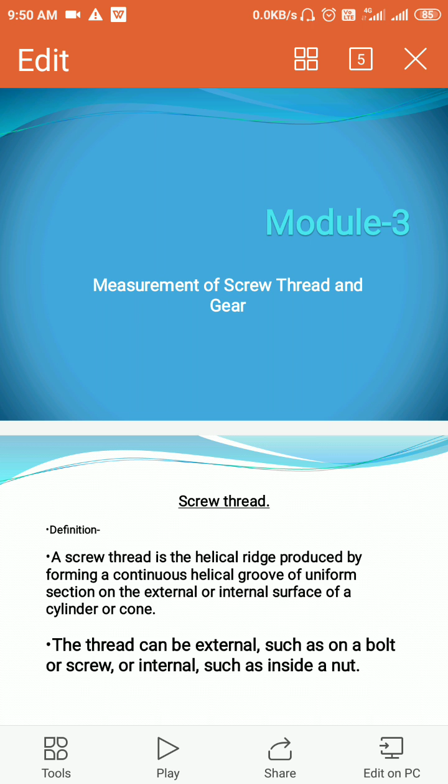This is the new module: measurement of screw thread and gears. Till now we have completed module number 1, module number 2, and module number 4. This module consists of two chapters: measurement of screw thread and measurement of gear. In the first three modules we have completely covered the whole syllabus. In this module I will be covering only one chapter, measurement of screw thread. Then we will go for module number 5.

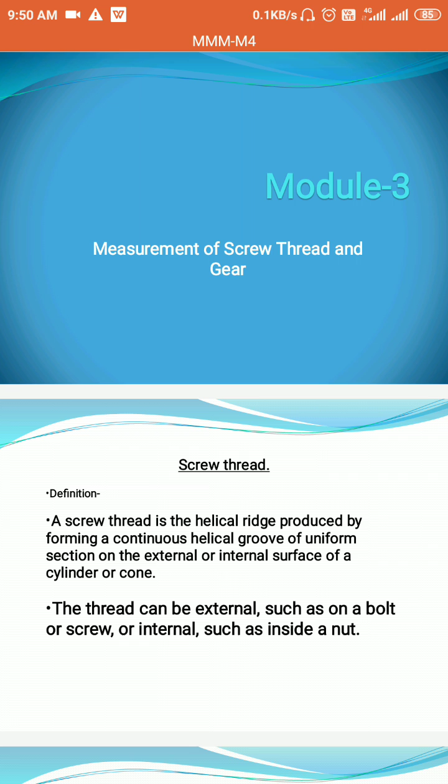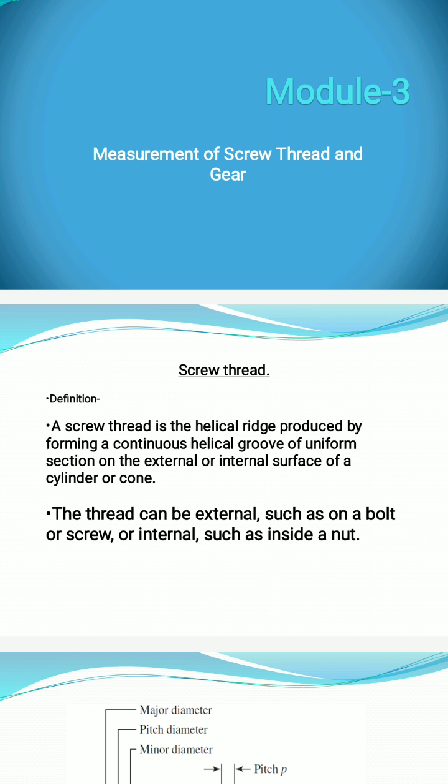So we all know what a screw thread is. A screw thread is nothing but a helical groove produced on a cylindrical body. It is a helical groove that is produced on the external part of a cylindrical rod or body. If this helical groove is produced on the external surface of the cylindrical body, it is called an external thread. And if this helical groove is produced on the interior part of a hollow cylinder, it is called an internal thread. So there are two types of threads: external threads and internal threads.

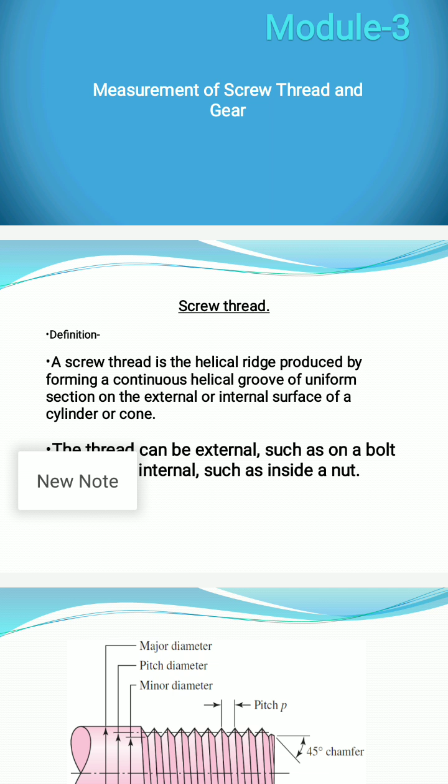What is the function of a screw thread? Why are screw threads used? You all know. Yes, screw threads are used mainly for fastening purposes, for assembling two or more components, for holding two or more components tightly, to produce a grip between two or more components. A screw thread is used for this.

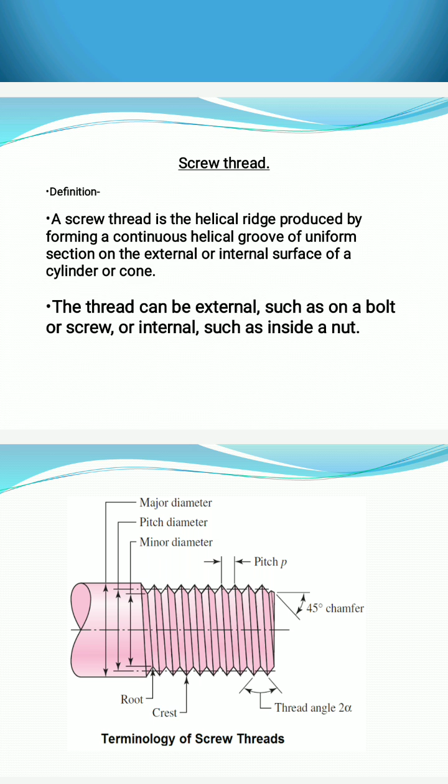Other than that, threads are also used for power transmission. An example is a screw jack. A screw jack, as we all know, has square threads or buttress threads. These are used for lifting weights, lifting cars, lifting auto rickshaws when you want to change the wheel. So that is why screw threads are used for power transmission.

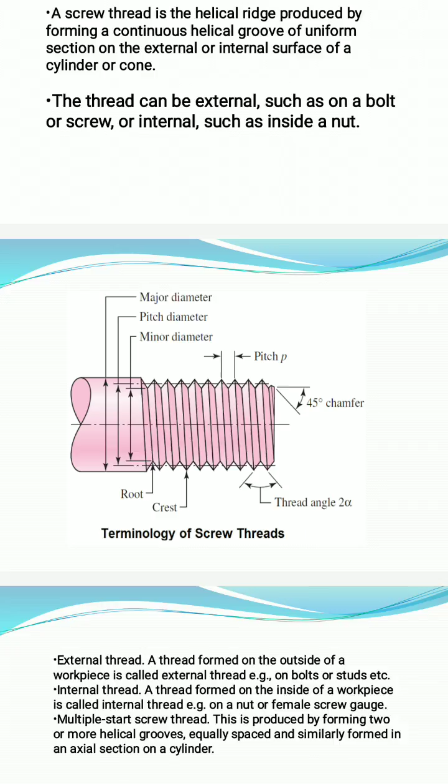They are also used for fastening purposes, assembling two or more components. Now we see the terminology of the screw thread. You all see the screen. In the screen you are seeing the terminology of the screw threads. This chapter is not new for you, but we will define all the terms. You see some of the major terms on the screen.

The first terms are the crest and the root. We will define what a crest is and what a root is. Crest is the top surface of a thread. You are seeing an external thread on the screen, so I have marked and named the crest there. It is the pointed, topmost surface of the thread. It is called the crest.

What is the root? The bottom portion of the thread between two flanks. That bottom point is called the root. Next, what is major diameter? It is the maximum diameter of the screw thread. What is minor diameter? It is the minimum diameter, a line connecting all the roots of the thread. Next, what is pitch diameter?

Between the major diameter and the minor diameter, one more diameter is there. It is called the pitch diameter or the effective diameter, which lies in between the major and the minor diameter. What is a flank?

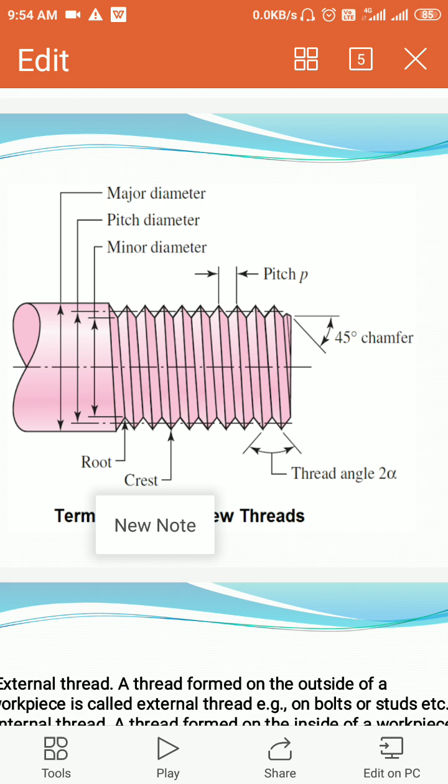The surface of a thread is called a flank. Between two flanks the angle is there; this angle is called 2 alpha or thread angle. The angle between two flanks of a screw thread is called the thread angle.

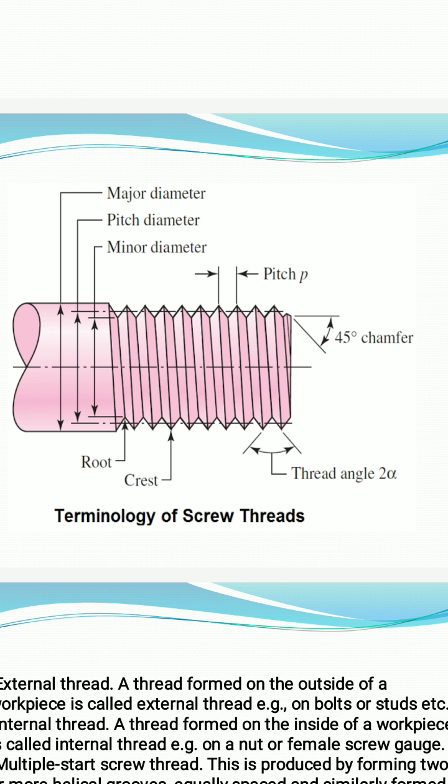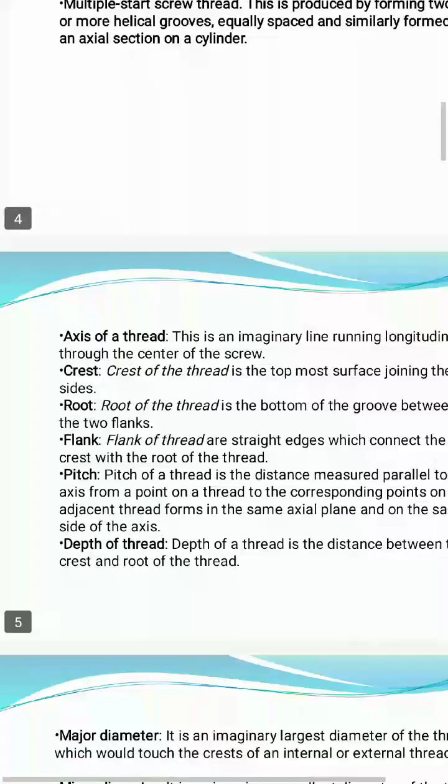Next, what is pitch? Pitch is the distance between two consecutive threads, as shown in the diagram. On the screen I have defined all these terms. What is axis? Axis is an imaginary line running through the center of the screw. I have defined crest, root, flank, pitch, and depth of the thread.

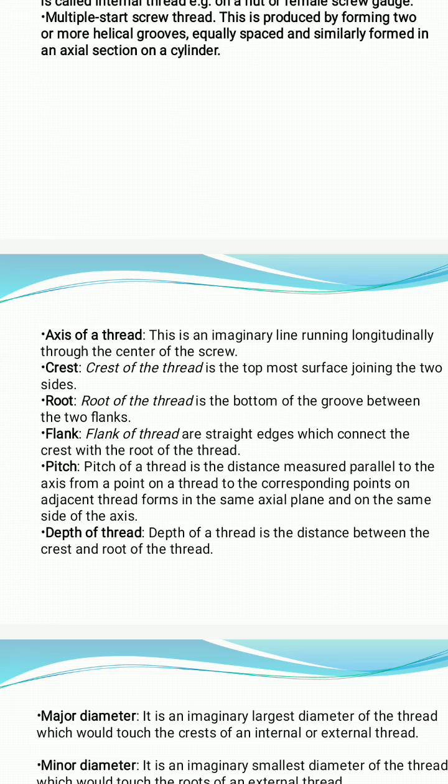The depth of thread is the distance from the crest to the root of the thread. Next, I have also defined major diameter, minor diameter, and pitch diameter. Pitch diameter is also called the effective diameter. It is defined as the theoretical diameter that lies between the major and minor diameter of a screw thread.

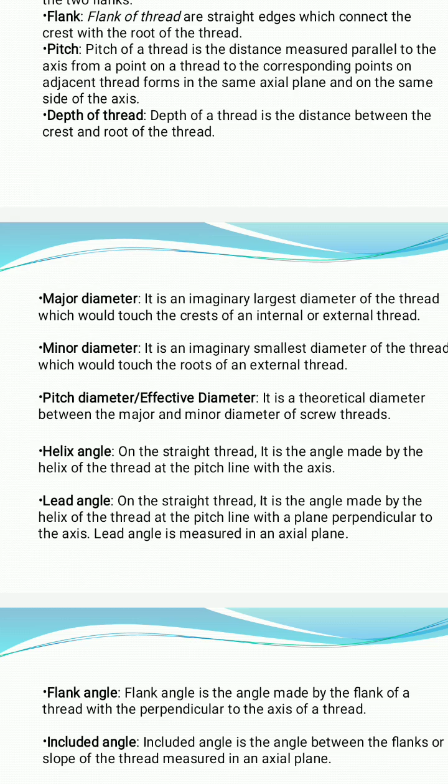Next, what is helix angle? It is the angle made by the helical groove with respect to the axis. This angle is called the helix angle.

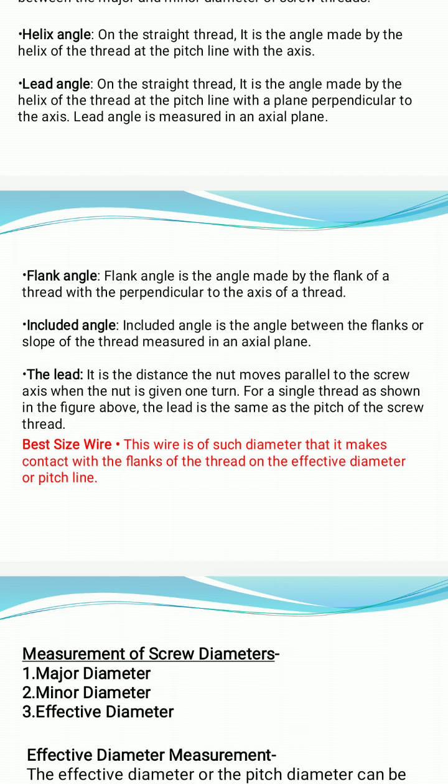Next, what is the best wire? There is a wire used for the measurement of diameters of the thread. Later on, we are going to measure the effective diameter of a screw thread using a wire called the best wire. This wire is called the best wire because the wire used for the measurement of the effective diameter should be such that it makes contact with the two flanks of the thread. Imagine, the wire should contact between the two flanks of the thread.

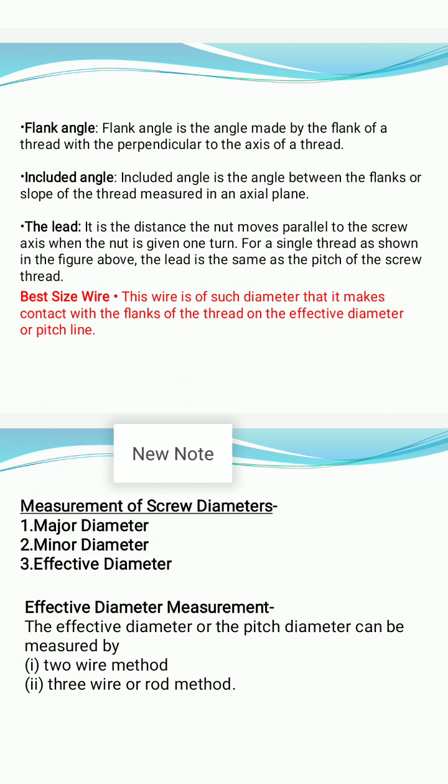The wire should contact the two flanks of the thread in between major diameter and minor diameter, meaning it should contact on the effective diameter or the pitch line, at the pitch diameter. This diameter of wire is called the best size wire.

This is the terminology of screw threads. The next part is measurement of screw threads. What are the parameters we measure using screw threads? We measure major diameter, minor diameter, and effective diameter. Today we are going to see how to measure the effective diameter.

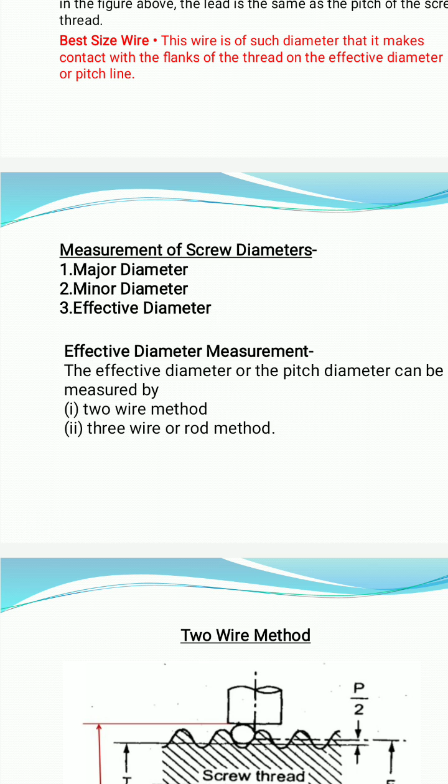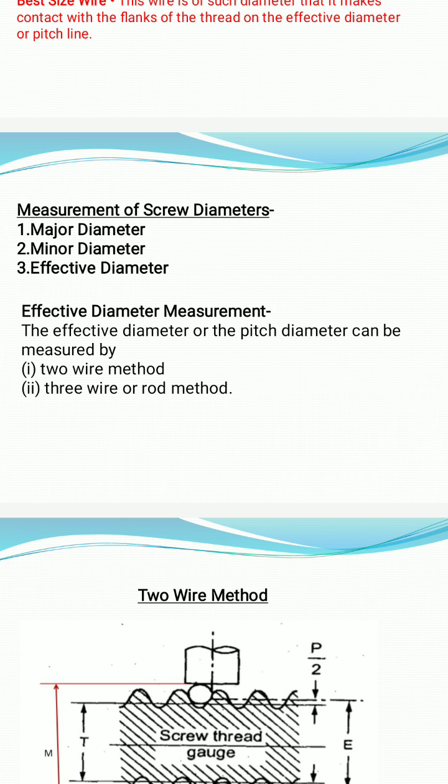Effective diameter is the diameter which lies on the pitch line, also called pitch diameter. It can be measured by two methods: two-wire method or three-wire method. If two wires are used for measuring the diameter, it is called the two-wire method, and if three wires are used, it is called the three-wire method.

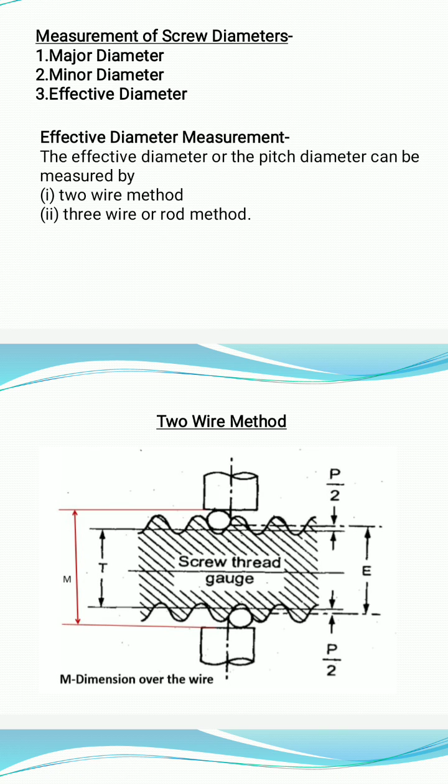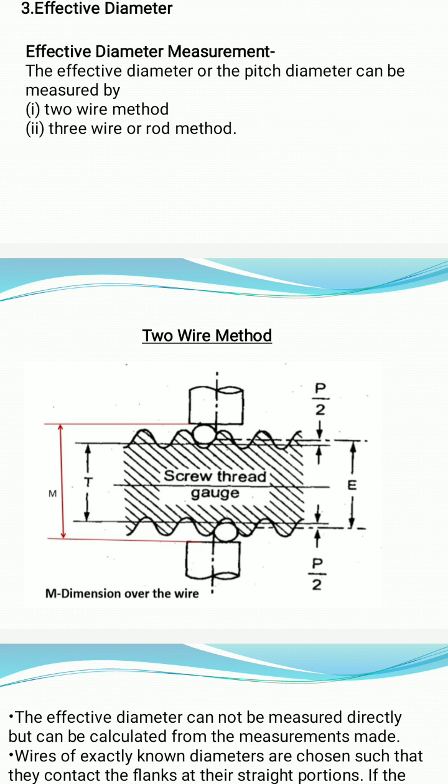You can see on the screen how the two wires are fixed and how the diameter is measured. A screw thread is there; one wire is fixed positioned on the top side, one on the bottom side, and along with the wires, the screw thread is held using a screw gauge. The anvils of the screw gauge hold the wires as well as the screw thread.

If you imagine the diagram now, what do I want to measure? I want to measure the effective diameter. So some terms are shown there: capital M, capital T, capital E, and P by 2. Effective diameter is the diameter which lies on the pitch line. Major diameter is maximum, minor diameter is minimum, pitch diameter is in between. It is denoted by capital E in the diagram on the right side.

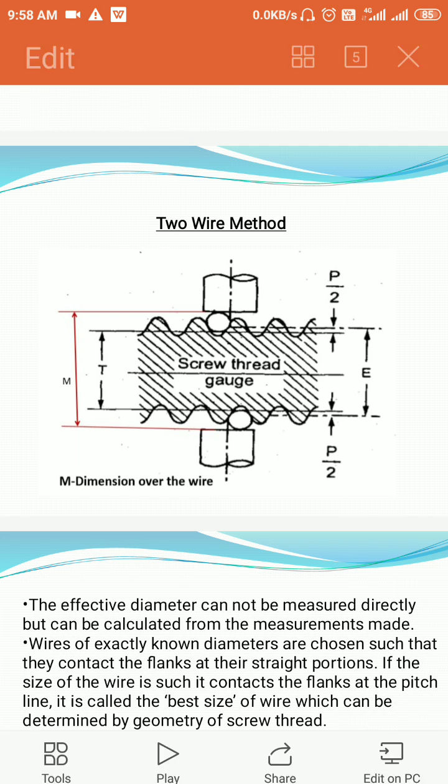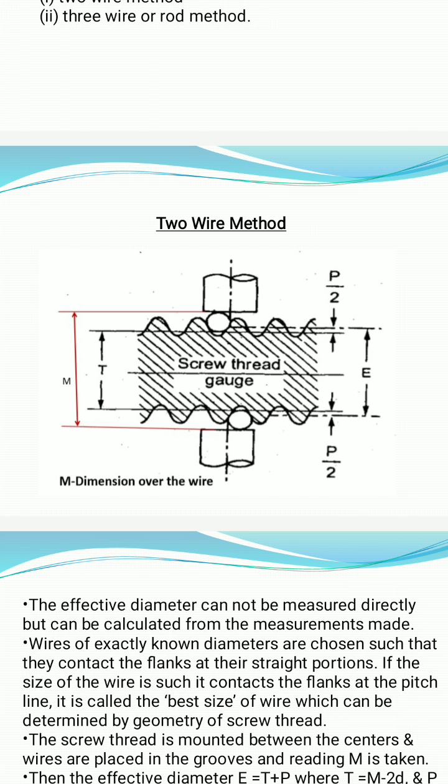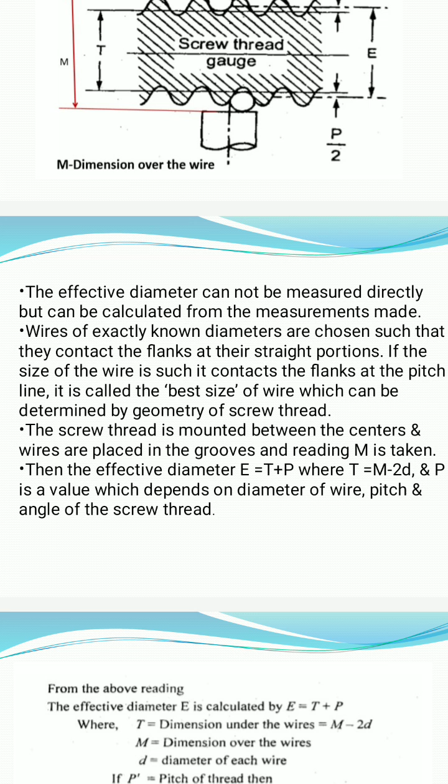Now to define E, the effective diameter, see the formula in paragraph number 4 of the theory part. The screw thread is mounted between the centers and the wires, and the reading M is taken. M is the diameter above the wires, which we can measure using the screw gauge.

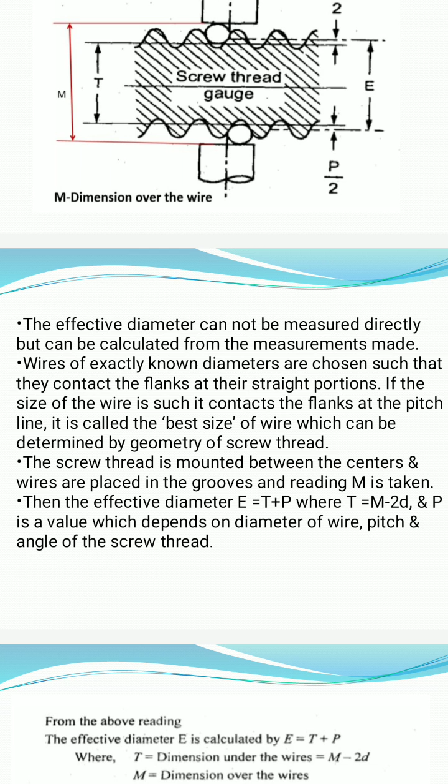P is the value which depends on the diameter of the wires. P by 2 can vary depending upon the best size, the best wire diameter. As best wire diameters vary, P by 2 may vary. So from this, how do we measure the effective diameter?

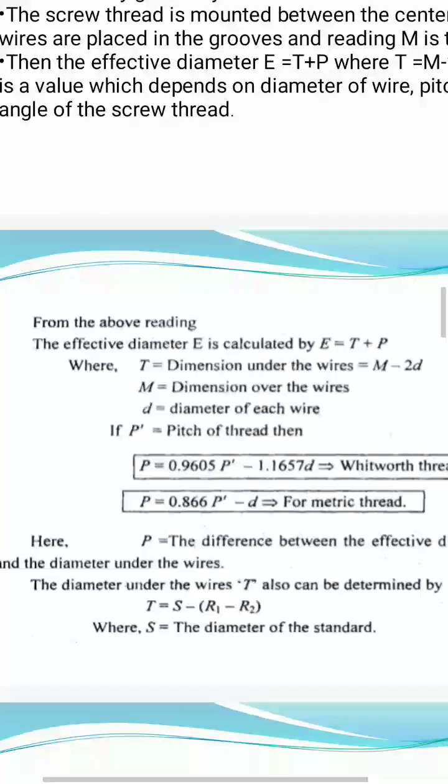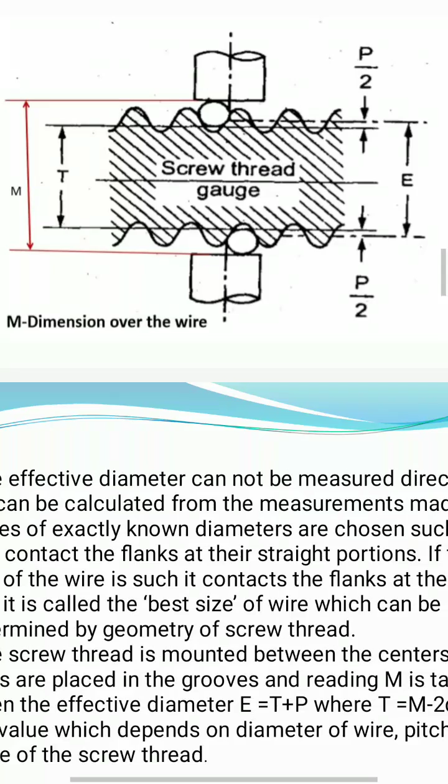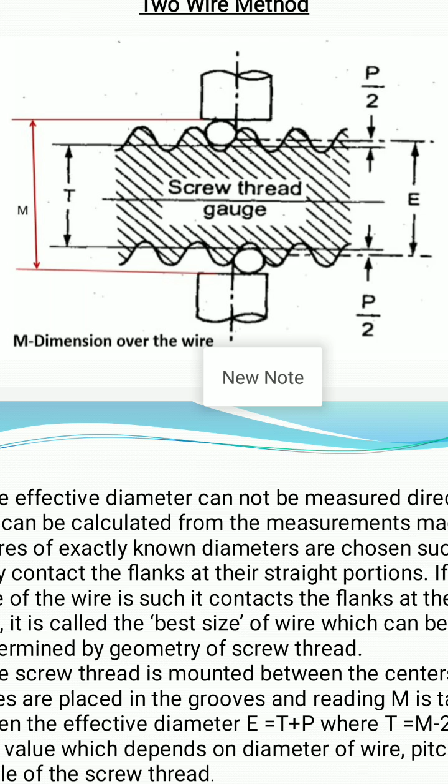Effective diameter E can be calculated by E equals T plus P. T is the diameter under the wires, the diameter of the screw thread under the wires. So capital T plus P by 2 on one side, P by 2 on the other side—two P by 2s together become P. So E equals T plus P.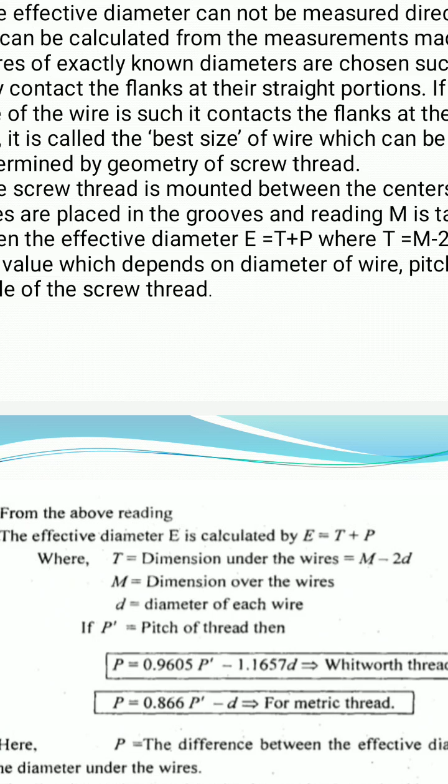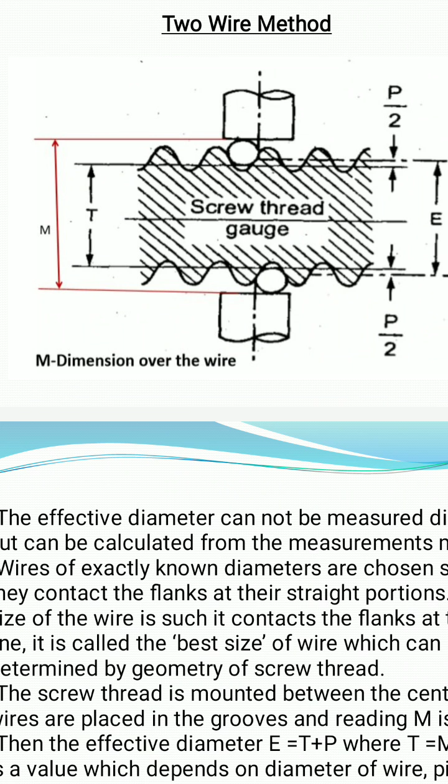We don't know both T and P yet. How to calculate T? We know capital M, the diameter above the wires, measured using the screw gauge. So T equals capital M minus 2 times the diameter of the wire. From capital M, if I subtract the wire diameter twice, I get capital T. Once we know capital T, P is remaining.

P is the distance between the pitch line and the under-the-wire line. So T equals M minus 2D, where M is the dimension over the wires and D is the diameter of the best wire, which is given to us. P dash is the pitch of the thread, which we know, and from the pitch of the thread we calculate capital P.

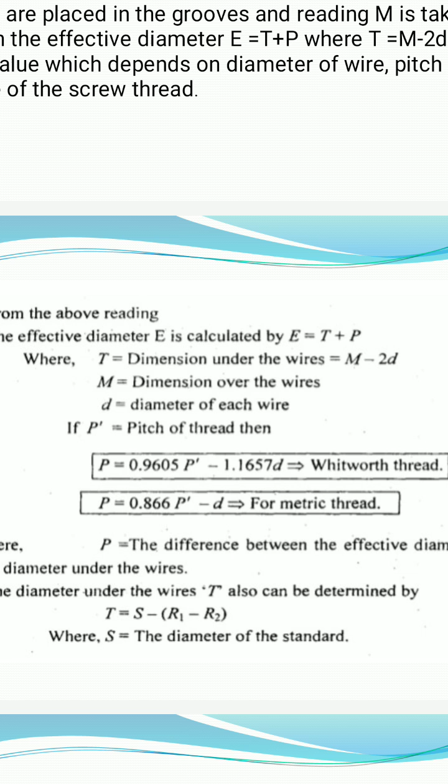Capital P equals 0.9605 times P dash for Whitworth thread, and 0.866 for metric thread. Using this formula we calculate capital P, and knowing T, we can calculate the effective diameter of the screw thread. This is how we calculate the effective diameter.

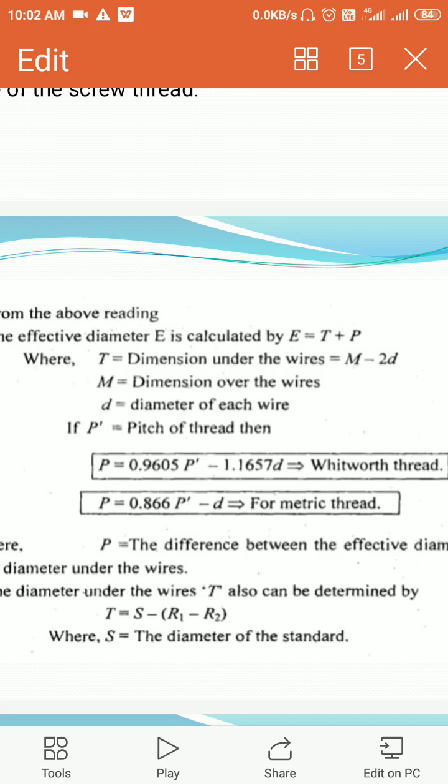In the next class we will continue with the further part. Today we studied the terminology of the screw thread, what types of threads are there, and how to measure the effective diameter using the two-wire method.